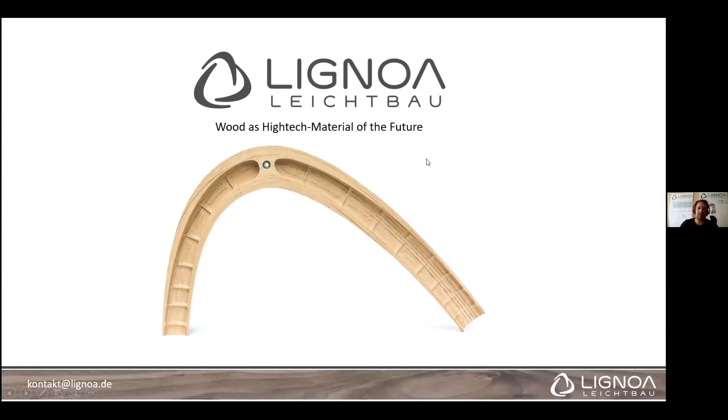And this is what it is about. Everything that we do is about wood. Wood as high-tech material. And most times with our developments and the products we develop, it is about lightweight, not just high-tech, it's lightweight most times. So what we do and how we work are those three pillars. So the first and most important step for us as a company is development.

So product development. We work as a development service provider, and we develop your products out of wood. So everything for us started with developing a wheelchair. During university, we wanted to develop a very light and a great designed wheelchair. And then we thought, oh, why is that not possible with wood? And we looked all over the world for technologies for producing free-formed wood tubes. So if you don't look to the presentation and look to my window, you see one of those tubes here.

It is three-dimensionally formed, and this process is what I will explain most in this presentation. Because the technology is very new and there is not so much experience with producing companies, we work as a subcontractor as well. This also means that at the end of development, we produce the products ourselves, and if the series is too big, we have two partners who are licensed with our technologies for continuing to produce the bigger series. And the third, I call it the startup pillar, is the technology development.

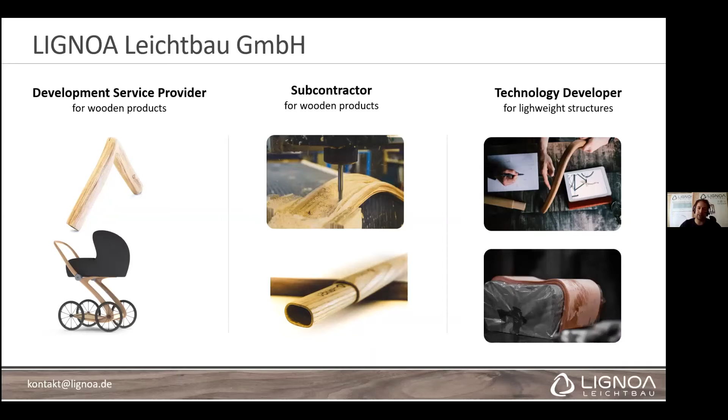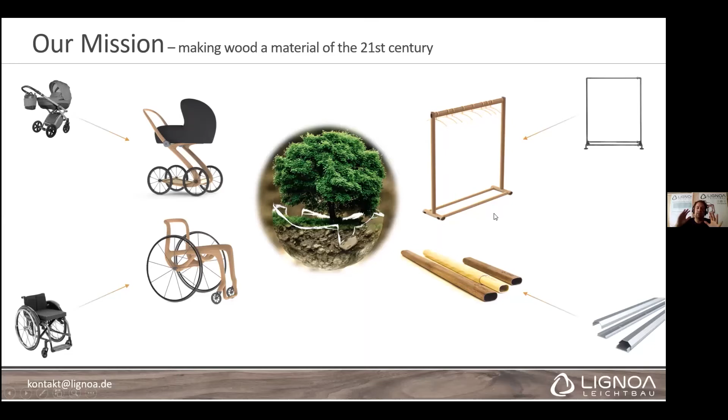So, like I already said, everything started here with that wheelchair that was part of my diploma. And I developed it together with Philipp Strobel over here. And then we got the question, is it possible to develop a stroller? And our aim is to develop very interdisciplinary products out of wood across all industries. So now I just talked about us. I will talk about wood now, about wood as lightweight material.

So, like I already said, I am a carbon engineer. Most steps of how we produce wooden products are very similar to carbon, especially the simulation or topology optimization that we do. So we are talking about a fiber-orientated material. Fiber-orientated material always means we hope that the load is exactly in the direction along the fiber, because like everybody knows, wood is very strong along the fiber and not so strong at the right angle.

So if you look to my video again, I will show you a veneer. This is very important in the following slides. This is veneer. Veneer is something that you cut out of a tree very thin, most times less than 2 millimeters. This one, for example, is 0.6 millimeters. And with this veneer, you can pull very strongly in the direction of the fiber, and at the right angle to the fiber it's very easy to crack. But because it's so thin, you can bend it very, very strongly.

And this is the point why we use veneer: because of the bending, we can orientate the fiber. This is one of the most important points for working with wood as lightweight material, not to have solid bars. So if we have a fiber-orientated material and talk about lightweight, I learned in Dresden at my university that the most important thing is not the technical properties, it's the specific technical properties. I know the tensile strength of wood in fiber orientation is much worse than titanium or carbon fibers, but we have a density of 0.4 up to 0.8, depending on which wood we use. That means we can use more material having the same weight, and then we have the same product properties. This means that we need enough space.

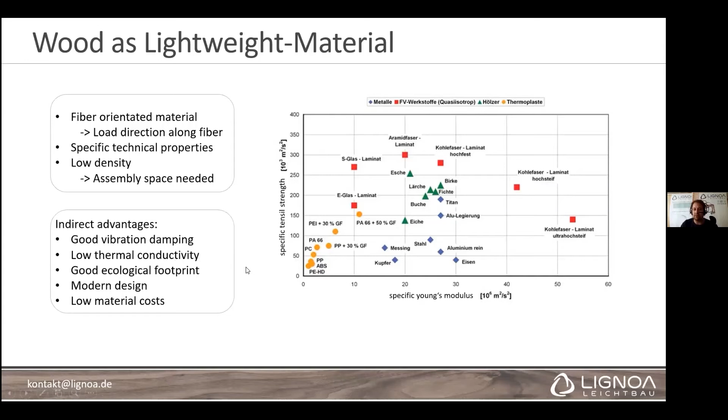And the points here are just interesting for the investors we are acquiring. But high sustainability, I will just talk about that shortly, because I don't have to explain that wood is very sustainable and very ecological. We have a lot of trees in Germany, in Europe. We can use much more wood without hurting the forests. We have CO2 stored inside the material. And that's all I want to say about that.

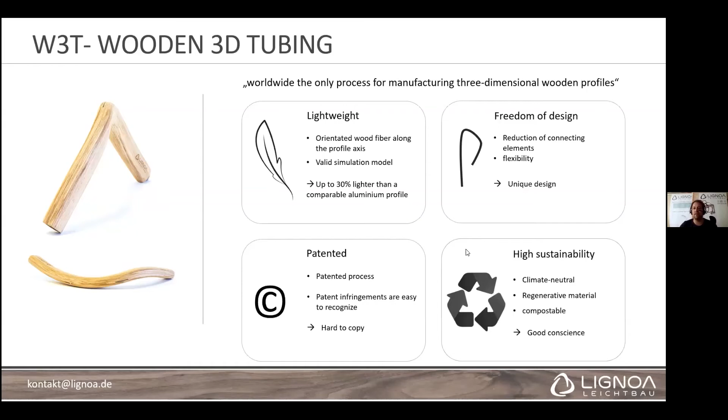If somebody is interested in the sustainability of wood, you can find like millions of slides about that on Google. I'm an engineer and not a sustainability man.

So, how do we develop a profile, a W3T profile? Like I already said, it's all about the orientation of the fiber along the load. I will explain how we produce it on the next slide. But here you see we have the fiber orientation exactly along the profile axis. Most loads, if you have a hollow profile, are in the direction of the profile axis.

Here, this part is one shell of a tube. I call it tube now. One tube consists of two shells. This means we get this profile hollow by milling it out. If we mill it out, we can mill out whatever we want.

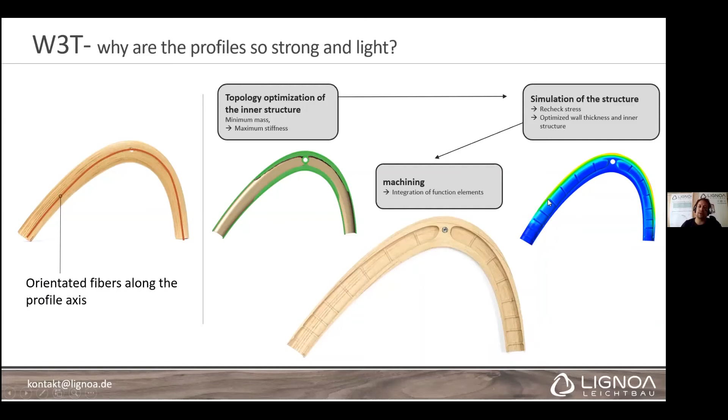And this is why we do topology optimization, because we have different loads, different strength needed in the product. So we do topology optimization, with the wall thickness variable depending on the load. After the topology optimization, we do a simulation. And after that, the machining makes it exactly the product we want.

Here are the 6 steps for producing a profile like that. I switch my explanations between the presentation and my video, so if somebody doesn't have my video switched on, it should be a disadvantage. So this profile is bent like that on the first form.

If you remember the veneer, it's bendable. If we have 40 layers of this bendable veneer and glue it together over the form, we get a very solid body consisting of 40 layers. This body we will cut into new layers. And the second step we do just for having fiber-orientated veneer.

So if you see the red lines, this is one surface, one plane that we want to cut out of the solid body for having a fiber-orientated veneer. This is the only sense of the second step. If we don't need a 3-dimensional formed profile, for example just a 2-dimensional form like the shell you see on the left side, then this step is not necessary.

The third step is the same step as the first one. The cut veneers, the fiber-oriented veneers, are bent over a form to have exactly the 3-dimensional fiber orientation. And after that, we mill the structure like I told in the slide before, producing 2 shells and glue them together. This is the point where most people say, "Oh, that's so costly. 6 steps for producing just 1 tube."

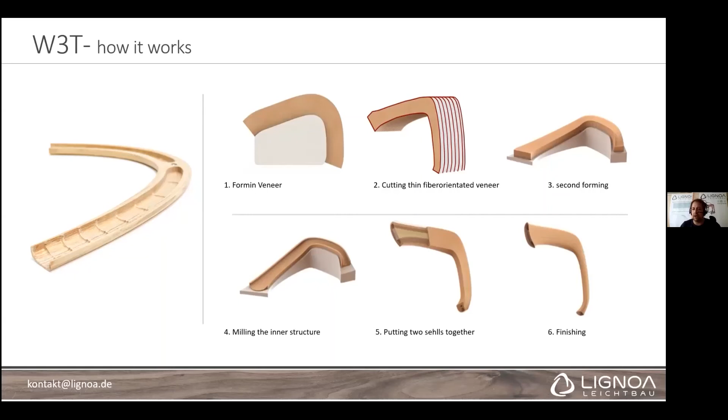And so it is not as costly as everybody thinks, because all of these steps are doable with standard presses and standard mills, CNC mills, and very easy ones. So in a bigger series, it is not too hard to process.

What does the result of a profile like that mean? If you compare it with a profile of aluminium alloy, a T6 aluminium alloy, when we look at a profile with the same weight, we have 10% more stiffness and 50% higher strength, and that's a lot. 2 times higher fatigue strength. So being lighter than aluminium is never a problem with our profiles.

Carbon, yeah, that's a target that we have. I think we need 1 or 2 more years to develop the process up to that point. But in some cases, we are even lighter than carbon. For example, if carbon is too strong, but we have the minimum wall thickness that is possible to produce with carbon, it's almost the same minimum wall thickness with wood, but because of the low density, we are lighter. But this is another point that is hard to explain without being on a stage.

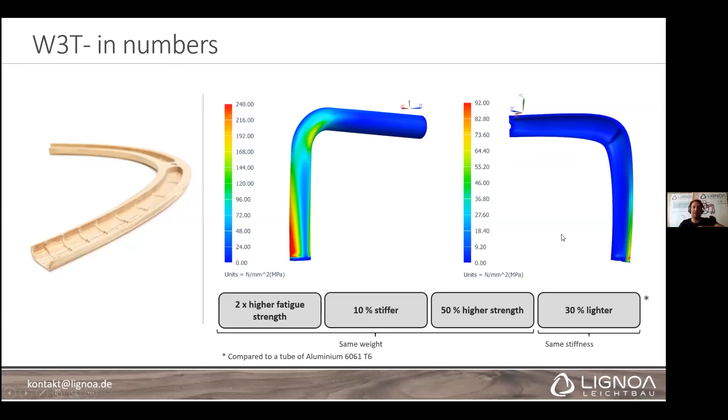So this is how it is possible to simulate wood. Most people are a bit afraid of simulating wood. I understand this. There are holes inside, it's not homogeneous, and all of this. But if you use 40 layers of wood and glue them together, cut them into new fiber-orientated veneers and glue them again together, the first 3 steps of the process, then you get a very high homogenization, and because of that, it's not very hard to simulate.

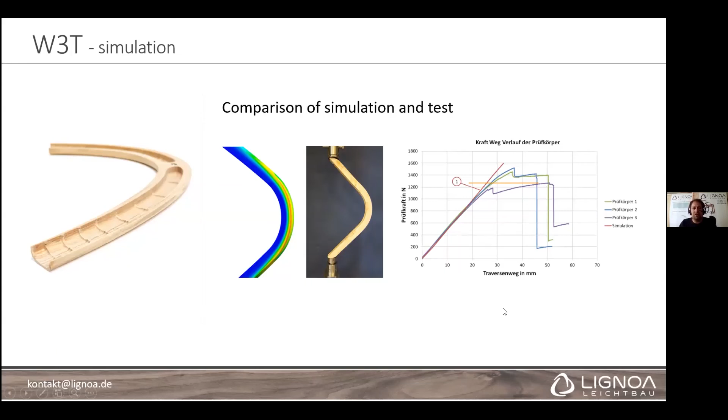With this process and another process that I will just shortly explain, we are independent of the wood type. We can use a lot of different wood types and a lot of different glues. The glue we use depends on the weather outside, if we're developing something for outside, or it depends on what situations the product has to work in.

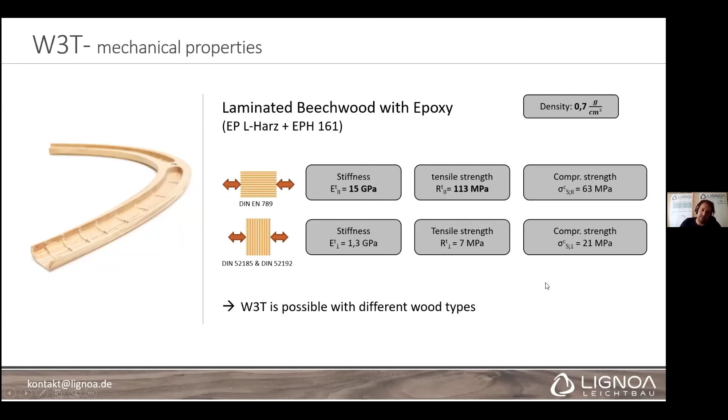It is also possible to use other glues and other wood types. Beechwood is very good, like we saw before in the Ashby diagram, but you can also use birch or oak. It depends on what we can buy cheaply as veneer in Germany now. This is just one example - we have better lightweight woods and worse ones, but beechwood is a very cheap one that is very good, so it has a good relation.

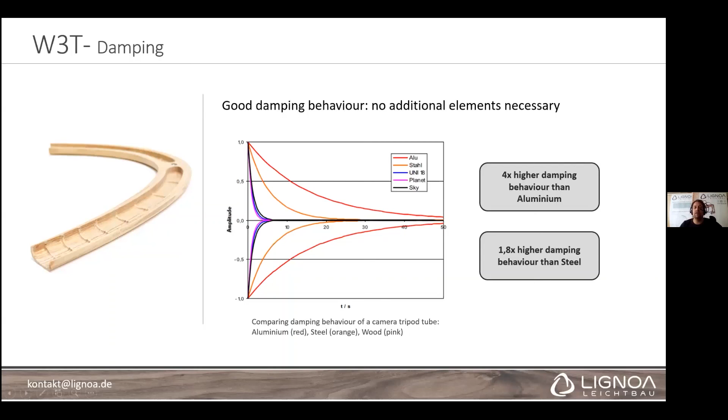I will shortly say something about the indirect advantages, like the damping behavior. Here you see the damping behavior, from the amplitude to zero. This one is aluminium, this one is steel, and this one is wood. We got a 4 times higher damping behavior than aluminium. So if you have a light aluminium product with an additional damping element, this may not be necessary if you take a wooden profile.

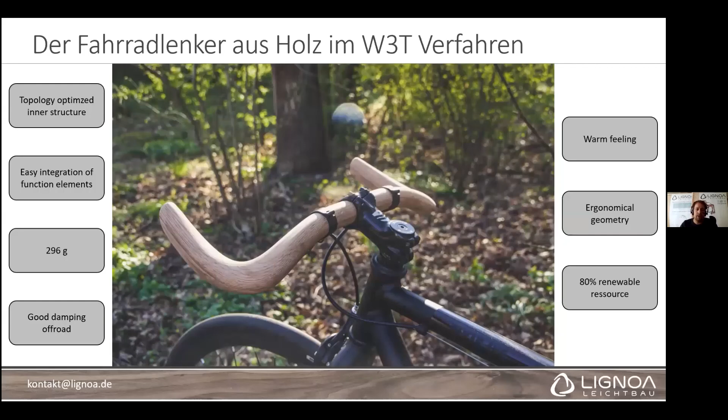So this was about the Wound 3D tubing - I hope there are some questions about that. I will shortly present another process for constructing lightweight structures out of wood, and this is about this tube. I don't know if you see it in my video, but it's hollow. It has the same thickness all over the profile, but the profile is not circular.

We can vary this profile, and this is why it's called free profile tubing. The tubes we produce with free profile tubing are the lightest wooden tubes in the world - there is no other wooden tube as light as this one. We can define the layers, so we have 4 layers in the wall thickness, and we can completely define the fiber orientation. We use this, for example, for the tripod for cameras and things like that.

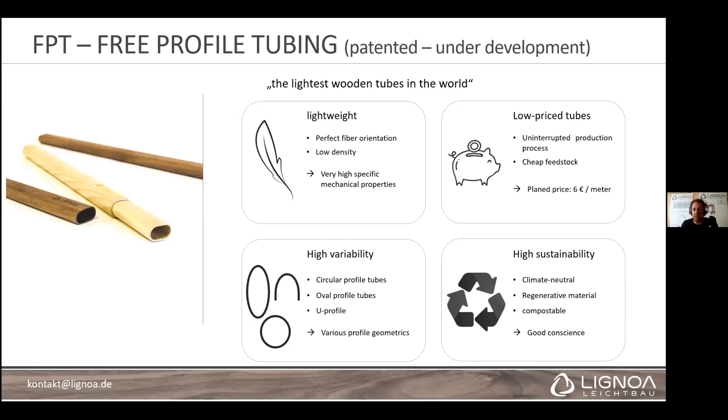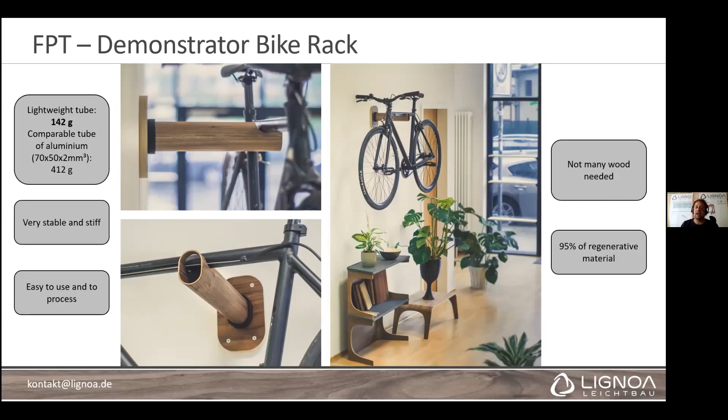We are developing a pultrusion process for producing these kinds of tubes, to have a very low-priced alternative to aluminum tubes, steel tubes, or polymer tubes. Here you can see one example where we use this in our office, but like I already said, a tripod or a pedal that we developed - it's usable there too. I think everywhere you need straight tubes, this should be the process for wooden straight tubes.

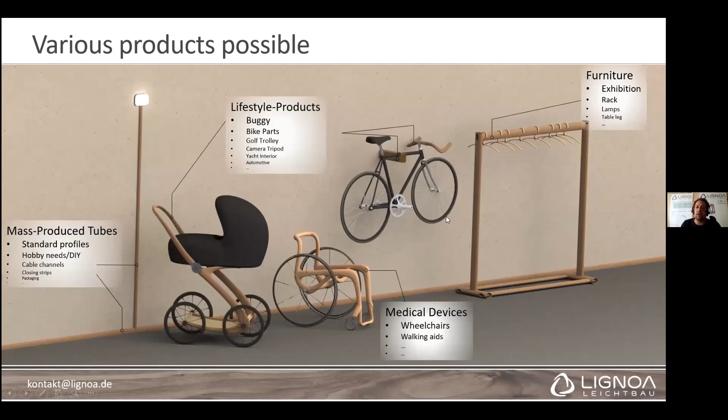This is what I wanted to show you at the end of my presentation. The interdisciplinary nature of our processes for wood as a lightweight material should be independent of the area - we are not a subcontractor for automotive. We could be, but we want this to just be a part of that. We want to work across all industries - it doesn't matter if it's a tube for cable, furnishing, medical devices, or lifestyle products. We are developing these technologies, and if a technology doesn't exist up to now, perhaps we will develop it in the coming years. So thank you very much.